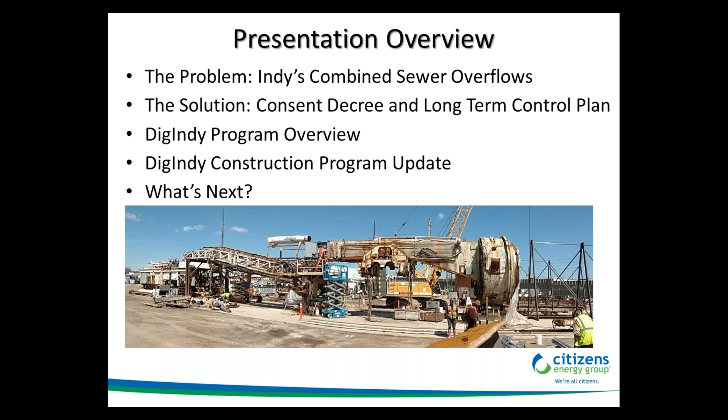Just to set the tone for the rest of the presentation, I'm not a big fan of slides with lots of words, so I'm going to try to keep those to a minimum. But there will be a few, so please just bear with me for a few slides, and then we'll get into more of a show and tell mode a little bit later on.

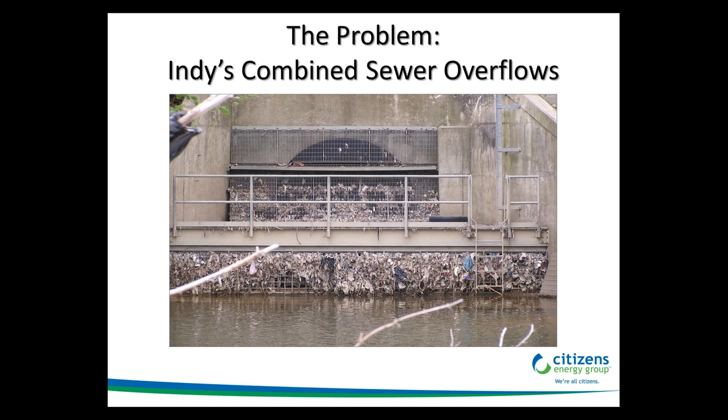So quickly, for anyone that may not be familiar with a combined sewer system, I'll provide this brief explanation. Basically, during dry weather, a combined system collects and conveys sanitary flow from residents and businesses to a wastewater treatment plant, where the flow is treated and released into a water body.

However, during wet weather, the combined system also collects storm flow, and in many cases in our northern cities, snowmelt, which combines with the sanitary flow. During certain size weather events, the system becomes overwhelmed, and rather than backing up through storm grates and into basements, combined flow is released to a water body.

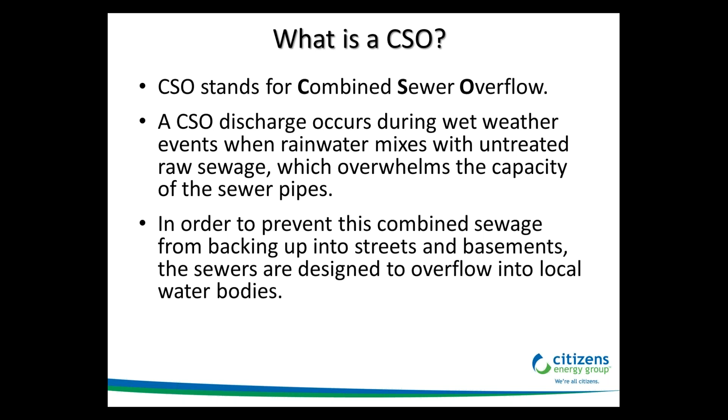Each year, there's an average of approximately 60 overflow events, spilling about 6 billion gallons of combined sewage into our waterways. Just to provide a little perspective, if we considered Indy's professional football stadium to be a vessel, we would have to fill it up 16 times to equal approximately 6 billion gallons.

Not to mention, portions of our system are so overwhelmed that as little as a quarter inch of rain in certain parts of town can trigger an overflow event.

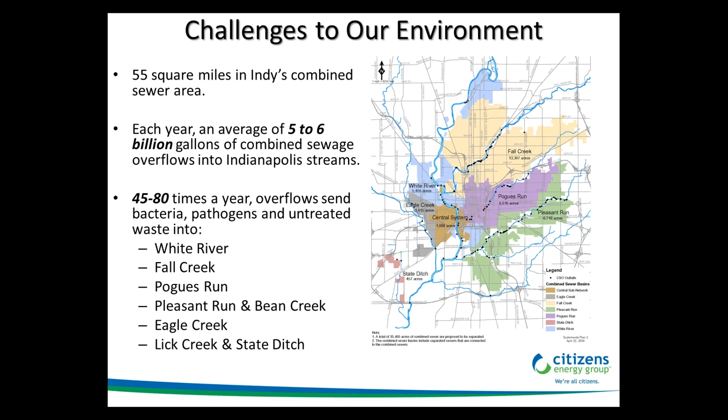So I've defined the problem. Now, what are we going to do about it? Just a little bit of background here. CSO abatement actually stemmed from the Clean Water Act. Ultimately, CSO communities must enter into some form of settlement with the Department of Justice and the EPA. Usually those agreements come in the form of a consent decree.

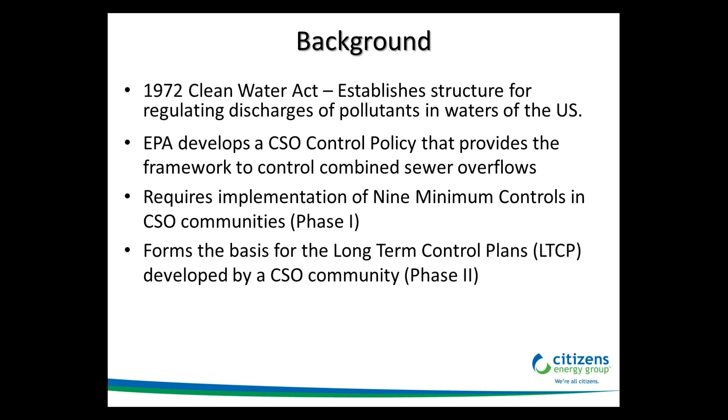A consent decree is a settlement binding a CSO community to comply with the EPA's CSO control policy. And what I'll be concentrating on for the rest of this presentation is our long-term control plan, which lays out our DigIndy system, as well as the time frame for which we have to complete it. And finally, one other quick point before we get into the fun stuff.

The City of Indianapolis entered into their consent decree in 2006. But what is unique to Indianapolis' situation is that in 2011, Citizens Energy Group purchased the water and wastewater assets from the city. Per the terms of that purchase, Citizens became liable to comply with the terms of the consent decree, but the city actually remained party to the agreement as well. So it's actually in their best interest for Citizens to successfully comply with the consent decree.

And Citizens is somewhat of a unique entity in that we are a public charitable trust. In fact, we are the only public charitable trust that provides utility service in the United States. And the important takeaway here is that we exist solely to provide utility service to the residents of Central Indiana. And we're basically a private company that operates on a zero profit basis, so we don't have shareholders to answer to. And this is especially important when considering that we can procure projects outside of traditional municipal bidding laws, and I'll provide some examples of that in a few minutes.

As I previously mentioned, our long-term control plan was actually developed under the City of Indianapolis and their team of consultants, and Citizens inherited it in 2011. However, it does continue to evolve. Basically, there were a number of early action projects which utilized modified flow control or inline storage to take advantage of areas in the system that had excess capacity. And those projects actually eliminated a significant amount of CSO volume from entering our waterways.

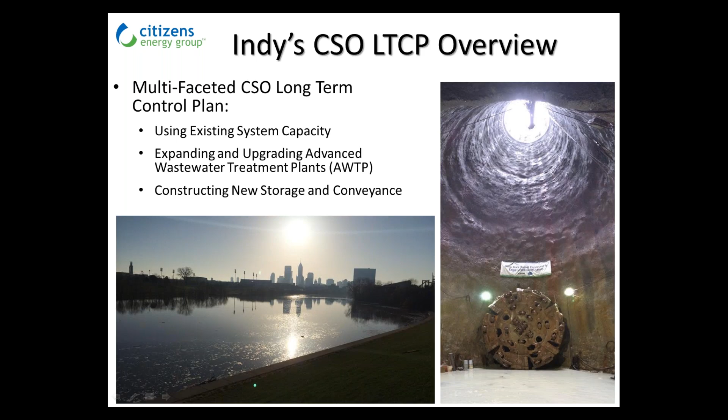So here we go with, as a construction guy, is the fun stuff, in my opinion.

The entire system will convey flow from north to south via gravity, where it will end up at our Southport Advanced Wastewater Treatment Plant. So while we do have 2 treatment plants serving Indianapolis, all of the tunnel flow and all of the CSO flow connected to the tunnel system will be conveyed strictly to our Southport plant.

But after a CSO event, the flow will be stored in the tunnel, and then it will be lifted by a 90 million gallon per day pump station almost 300 feet vertically up into the plant. The entire system has a storage capacity of well over 250 million gallons per event, and that will allow us to comply with our consent decree terms, which requires 95% capture by volume.

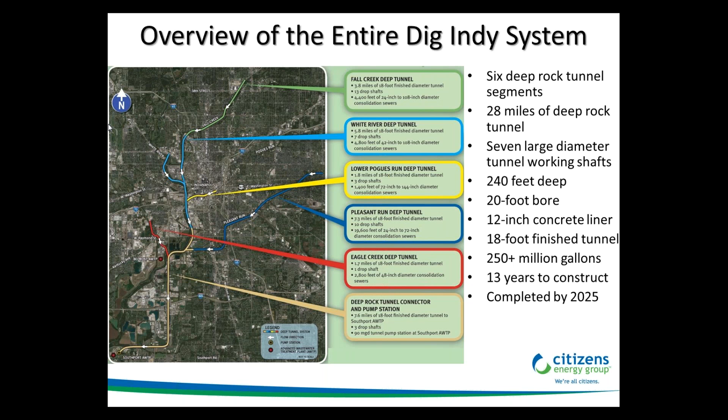Flow will be diverted from CSO outfall structures and consolidated through soft ground surface sewers, where it will enter one of 33 planned drop shafts. The drop shafts extend down into deaeration chambers, which are connected to the main tunnel through smaller tunnels referred to as adits. Depending on where the drop shafts are located with respect to the main tunnel, the adit lengths in our system can vary from a few feet to hundreds of feet.

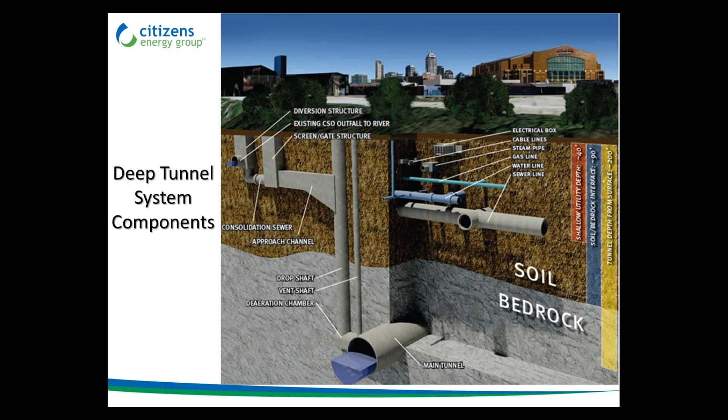At each drop shaft location, we also have a vent shaft that extends down into the deaeration chamber. The vent shafts are necessary because we utilize tangential vortex drop shafts, which entrain a great deal of air as flow falls down the drop shaft. The deaeration chambers allow for the air to escape rather than inhibit filling of the deaeration chamber and tunnel.

Our design team spent a great deal of time studying different drop shaft scenarios, including extensive physical modeling at the Iowa Institute of Hydraulic Research as well as Auburn University. The photo on the right was taken during a visit to Iowa to view some of the physical modeling they were performing for us.

I mentioned earlier that we have 134 CSO outfalls in the system. The tunnel won't capture all of them, but we will be consolidating approximately 100 of them into 33 drop shafts. We want to keep the number of drop shafts down to a minimum due to the cost to construct and the surface disruption, and we're actually studying eliminating 2 of them along our Pleasant Run alignment as we speak.

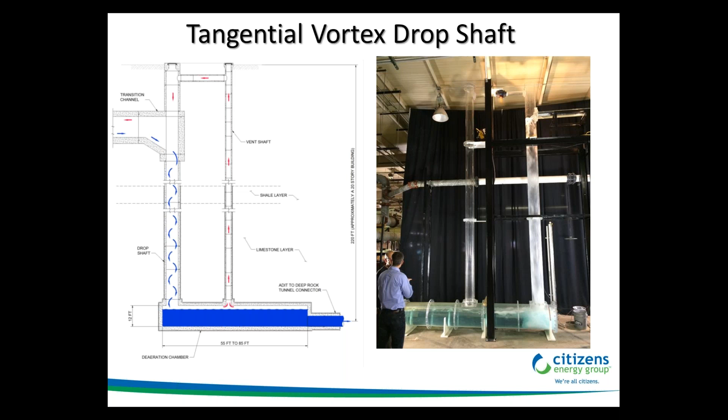So the program is constantly evolving. Because I mentioned the deaeration chambers and vent shafts, I want to take a quick second to discuss tunnel ventilation with respect to air exiting the main tunnel during filling. We have about 250 million gallons of storage capacity, and when it's empty, it's full of 250 million gallons of air.

On the right is a screenshot of our transient flow model, and you'll notice that during our design storm, the tunnel system fills from the middle. This actually traps a massive amount of bubble, which I lovingly refer to as the tunnel burp, at the downstream end of our tunnel. As filling continues, this bubble will be forced upstream along the crown of the tunnel, where it will eventually exit at the first few shafts it encounters.

Our issue is that the first couple of shafts are small diameter utility access shafts, and the velocity and violence that the air exits will cause geysering. We know that other systems, including Chicago's TARP system, has had real issues with geysering, and they've actually experienced geysering events so violent that manhole structures have been blown out of the ground.

So we've done extensive research and physical modeling to understand this phenomenon, and to prevent geysering in our system, we're actually going to seal off our utility shafts where they intersect the tunnel, forcing the tunnel burp up to one of our larger diameter tunnel working shafts. We're also building bulkheads along the crown of the tunnel at a few of our branches to keep air from heading towards dead ends and directing it to larger diameter shafts.

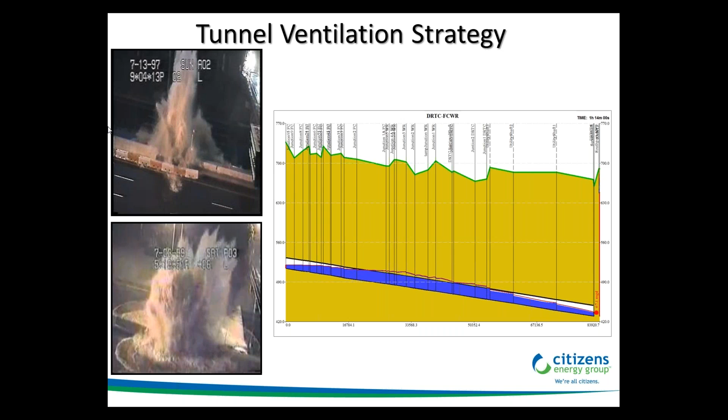So I talked a lot about the number of shaft locations that we have to build, and that really is where the surface disruption and the visibility of our program is going to come into play. The map here represents each of our drop shaft locations as well as our deep tunnel working shafts. Just to provide a little perspective and space, the yellow line, our Lower Pogues Run Tunnel, runs right through downtown Indianapolis. Interestingly enough, the 28 miles of deep tunnel that we're constructing is minimally impactful to the community.

We have a whole team of folks that work to form relationships and educate literally thousands of stakeholders impacted by the tunnel construction. We also have a team of real estate professionals dedicated to the land acquisition necessary to construct a program of this magnitude.

Designing and constructing a project like this isn't possible without poking a few holes in the ground, especially since it spreads out over 28 miles. So I won't spend a lot of time talking about the geotech, but it is important to note just how extensive a quality geotechnical program is for this size of project.

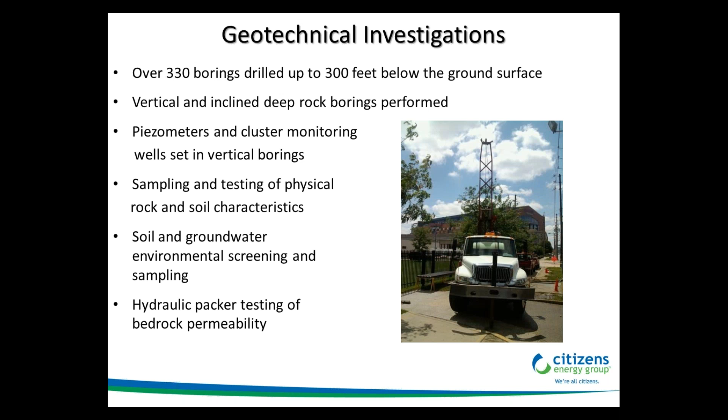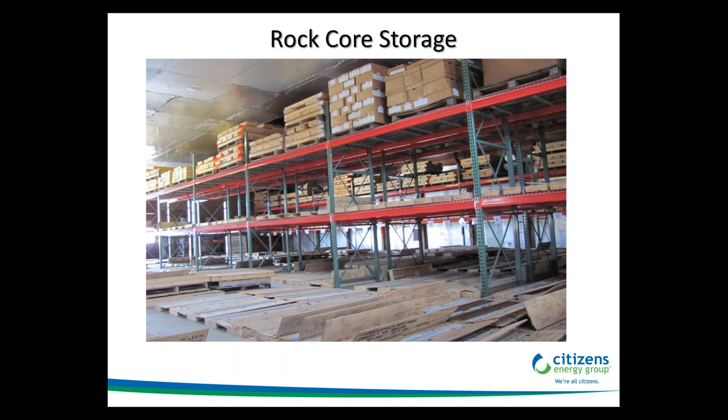You can imagine we collect a lot of samples with that many borings and the extent of the investigation. Here's a shot of part of our rock core storage warehouse, and another view of the other half with cores laid out. This was during a procurement event for our first tunnel project where contractors and their engineers were welcome to view the cores.

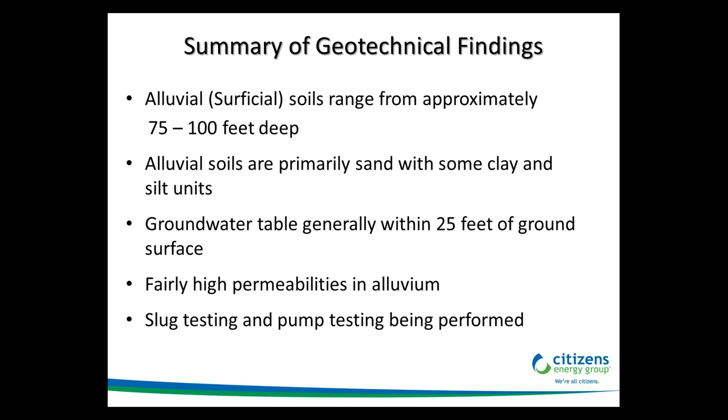So what did we find? Basically, on average, we have about 100 feet of glacial outwash over the top of our bedrock in the Indianapolis area. And we have a high groundwater table, which makes construction through pervious overburden very challenging. With respect to our rock, we have really favorable rock for tunneling. It's strong, but it's not overly hard or abrasive.

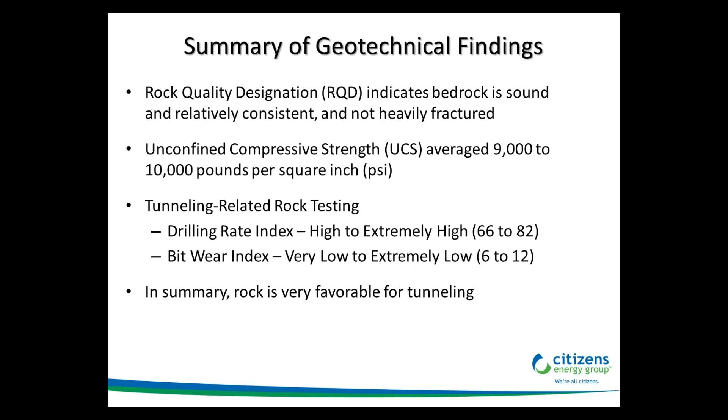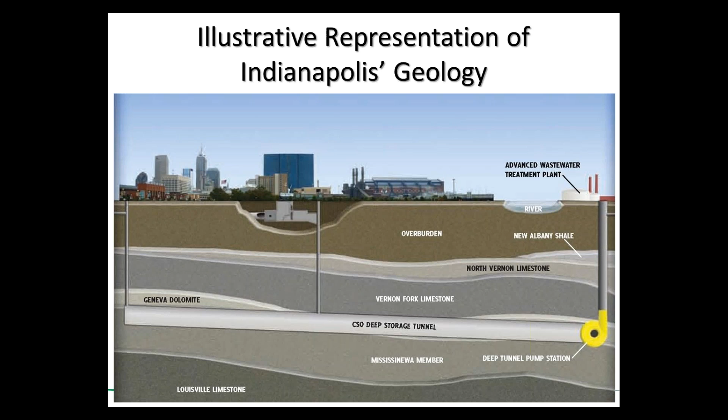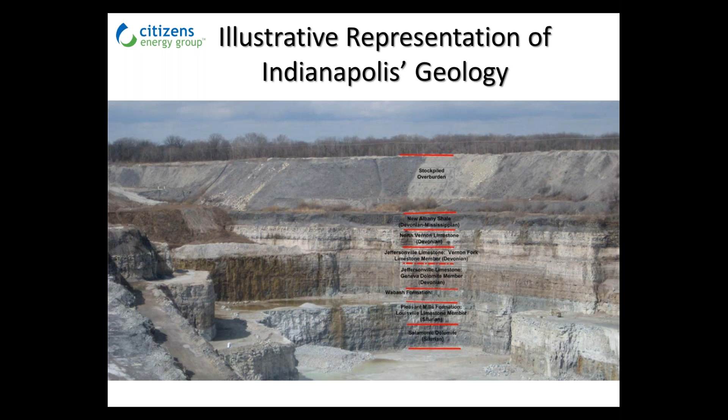I realize this is probably a little difficult to read, but we do have an aggregate mine within close proximity to the tunnel project. So, another representation of the area geology. We also have the potential for some karstic features, which can and do make water. We've never encountered one this large in the tunnel bore, but I've seen a few in the sidewalls of the tunnel that are on the order of a few feet in diameter.

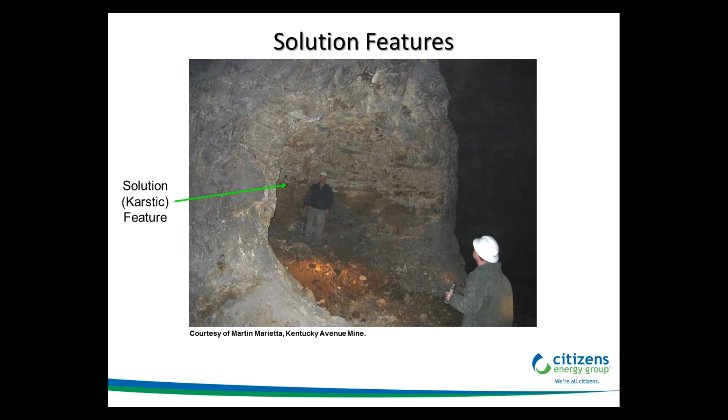Now I will transition over and spend some time discussing where we're actually at with the construction side of our program.

Based on the terms of the consent decree, we have a staged construction schedule. This allows us to spread out the construction effort and spend over time while still bringing parts of the tunnel system online early in order to gain beneficial use and start getting CSO flows out of the waterways as soon as possible. For example, when we bring the Deep Rock Tunnel Connector and Eagle Creek Deep Tunnel online later this year, we'll begin capturing about 1.3 billion gallons of CSO annually. And when White River Tunnel and Lower Pogues Run tunnels come online at the end of 2021, we'll experience a huge increase in that annual capture.

So beneficial use before the end of the program is a big deal to us, and it also demonstrates to our ratepayers, who ultimately fund this project, that we are making steady progress and recognizing environmental benefits along the way.

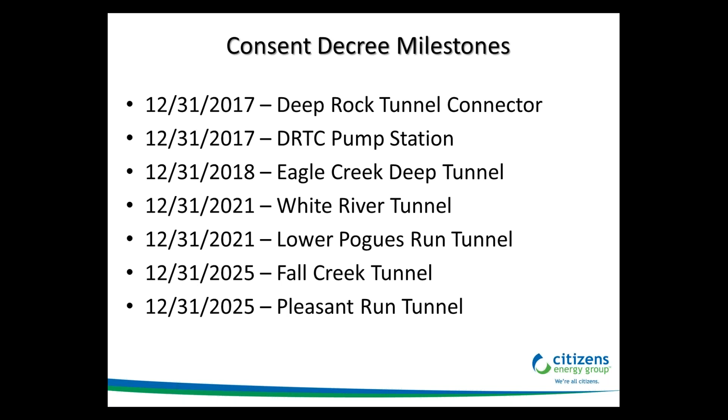I want to quickly point out that since construction commenced in January of 2012, we've received a lot of favorable press, both nationally and internationally. In fact, our project was recognized by ITA in 2015, which was a big honor. Of course, this is a testament to our engineering team and contractor. As an owner, we remain very humble and understand that without a huge team of talented people, success of this program wouldn't be possible.

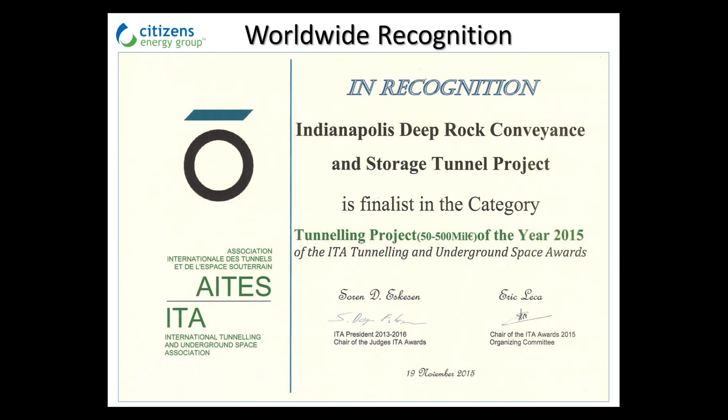I just want to take a second. I keep saying deep, so I want to provide some perspective on what our definition of deep is relative to our system.

On the right is a schematic showing the end of the line of our tunnel system and its connection to our deep pump station. If we were to place the Statue of Liberty in the bottom of our pump station, only her torch would stick out of the top of the shaft. That's just a little reference for what deep means with respect to our tunnel.

I'll also point out that the schematic on the right shows 2 shafts down to the tunnel prior to the connector tunnel to the pump station, and that will be important in the next slide.

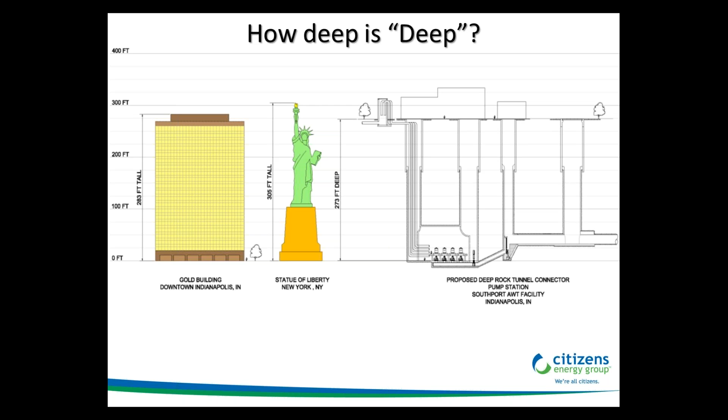Here's a closer look at our pump station. To reiterate, following a wet weather event, when the pump station is activated, CSO will enter the screen and grit shaft through the 18-foot diameter tunnel, or it will flow through a bar screen on its way through a 6-foot diameter connector tunnel.

The connector tunnel feeds a 6-foot diameter suction header, which is connected to 4 30 MGD pumps. The station is rated at 90 million gallons per day, so 3 pumps with 1 in reserve. Flow is lifted by the pumps up twin 42-inch discharge lines, where it is then conveyed to the treatment plant via gravity. One thing I'd like to point out, that the original tunnel launch shaft and the screen and grit shaft were 2 different structures as shown on the previous slide.

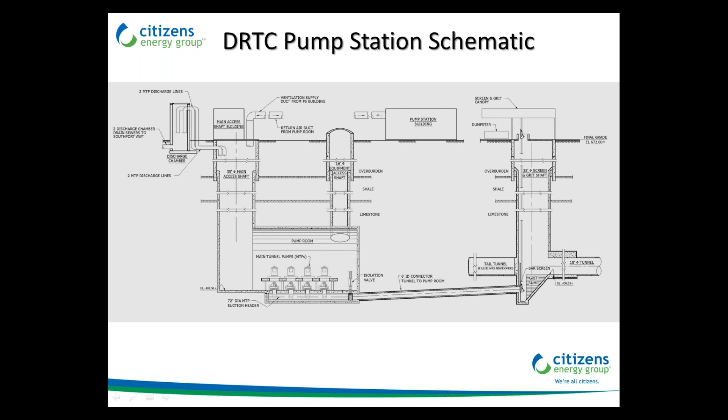However, through a value engineering exercise, the dedicated screen and grit structure was eliminated, and the tunnel launch shaft was converted into the screen and grit shaft after completion of the tunnel. This saved an estimated $8 to $10 million, and anywhere along our system that we can eliminate tunnel working shafts or drop shafts, we have done so, which adds up to huge savings over the course of the program.

And for you mechanically inclined folks listening today, here are some of the stats on our pumps. I'll also mention that our pump station contractor is a joint venture between Oscar Renda and Southland, both out of Texas. The pump station project commenced in mid-2014 and is expected to come online by the end of this year.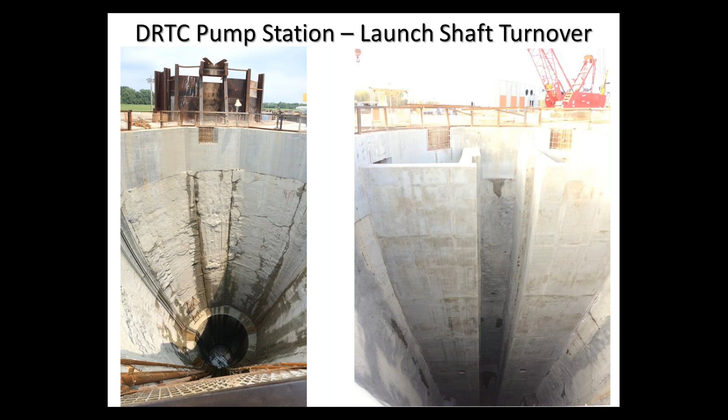On the left-hand side is our tunnel launch shaft prior to the screen and grit build-out. This was after mining was complete and the tunneling contractor demobilized from this shaft. On the right, you can see the guide walls that have been cast, which house 2 sets of guides for the rake mechanism that cleans the screens and the grit clam bucket to travel up and down.

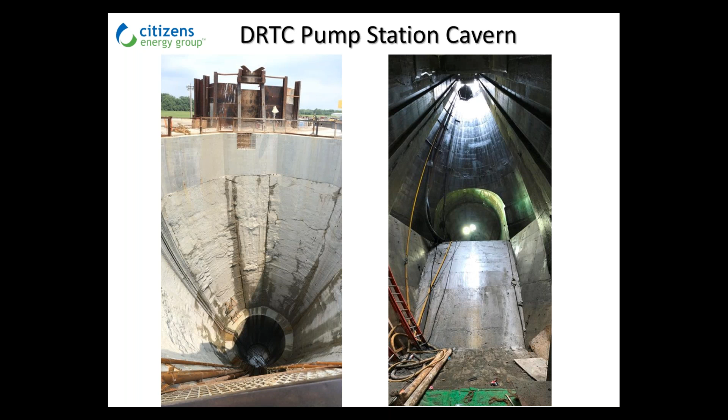The project was originally awarded just as the Deep Rock Tunnel Connector, as the Eagle Creek concept was for a shallow interceptor to be solicited at a later time. However, that shallow interceptor was a very high-risk project that extended open-cut construction through a business corridor, a residential neighborhood, and the city's levee and flood control system.

Our contractor was actually aware of that future soft ground project, but they proposed making it a deep rock tunnel instead, to mitigate the risk from the soft ground option. Their proposal included backing the tunnel boring machine up after finishing the Deep Rock Tunnel Connector drive, then relaunching it up the Eagle Creek alignment underground without the need for an additional shaft.

This concept was very innovative, and we worked with our engineers to fast track a design. We had to go out and get additional geotech, obviously work with our permitting agencies. In about 5 months or so, we went from inception of the idea to actually mining. So it was a really quick turnaround in a big effort.

But we were able to actually construct that Eagle Creek deep tunnel for less than the soft ground concept in the end. And due to the additional storage volume of 17 million gallons that the Eagle Creek leg provided us, we were able to eliminate about another $15 million in planned infrastructure that was downstream from this area.

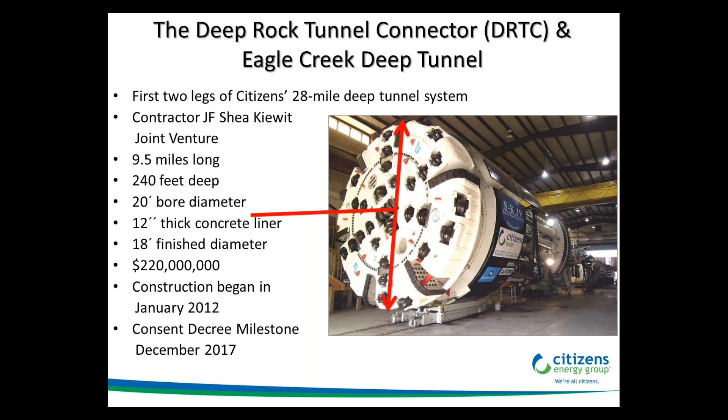I mentioned earlier that we are somewhat of a unique entity in that we are private, and so sometimes you have the advantage of being able to do things like a fast-track $38 million change order. So for us and our ratepayers, as well as the environmental impacts that change had, it's a huge benefit at times.

And speaking of the cutterhead, our contractor is using a Robbins main beam tunnel boring machine. In an effort to save a little time, I won't show the animation, but I will encourage everyone to check it out on YouTube later.

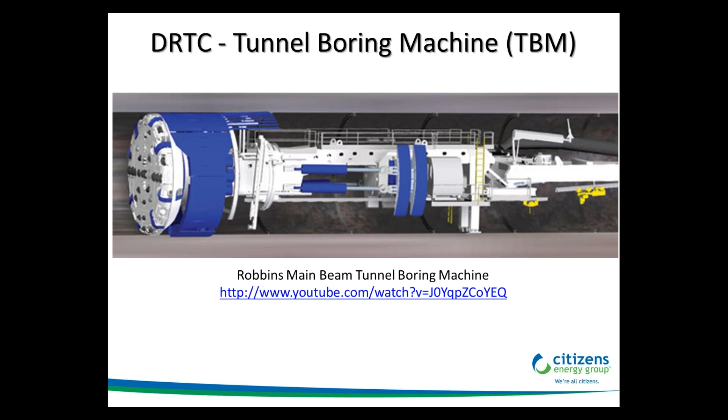Just a couple of interesting facts about our TBM, which is actually 40 years old and has been refurbished multiple times. It spent most of its life in New York and was most recently part of the Second Avenue Subway project. One thing I'll call attention to is that our TBM produces approximately 20 cubic yards of loose rock spoils per foot of advancement. So basically, one tri-axle dump truck leaves the site full per foot of tunnel mined.

Pretty amazing considering that the first two tunnel legs were about 51,000 feet. So that is a lot of truck trips and a lot of diesel fuel.

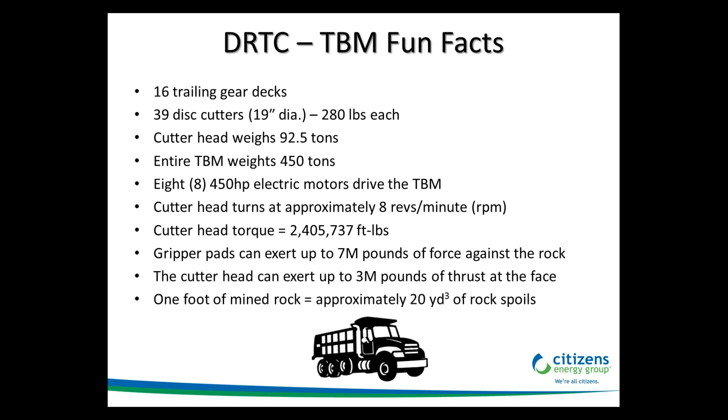I'll also point out that our contractor and this TBM achieved 3 mining world records for hard rock TBMs between 20 and 23 feet in diameter. This is a testament to the design of the cutter head, which Robbins made specifically for this project, the refurbishment of the machine itself, obviously the contractor's forces, and the quality of our rock that I mentioned earlier. The contractor claims on future projects in Indianapolis they will break these, so we will stay tuned.

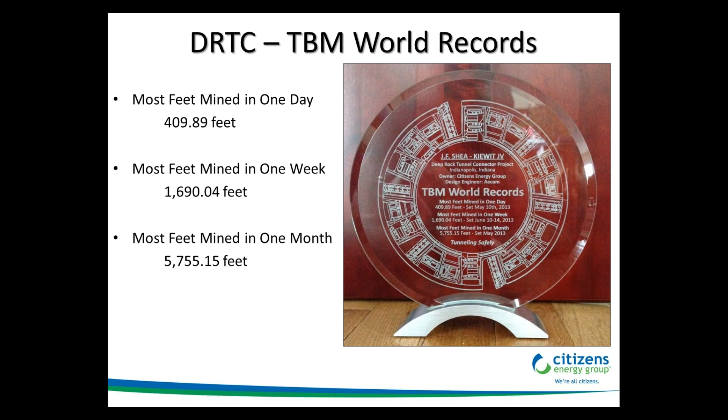In fact, the further out we got, I would venture a guess that the conveyor system was probably the limiting factor to the TBM production rate, but it did operate very well over the 7.8 miles of that first alignment.

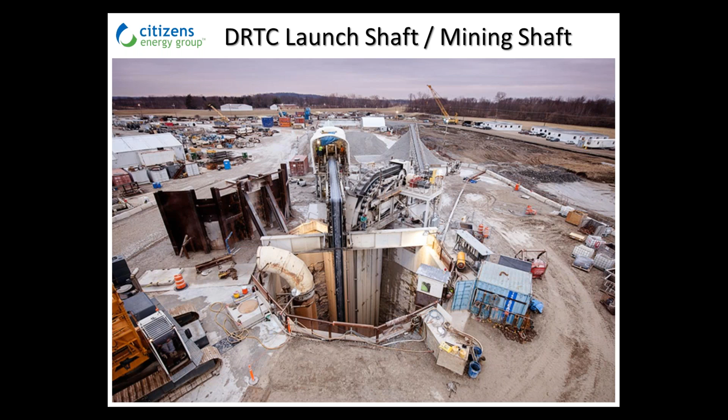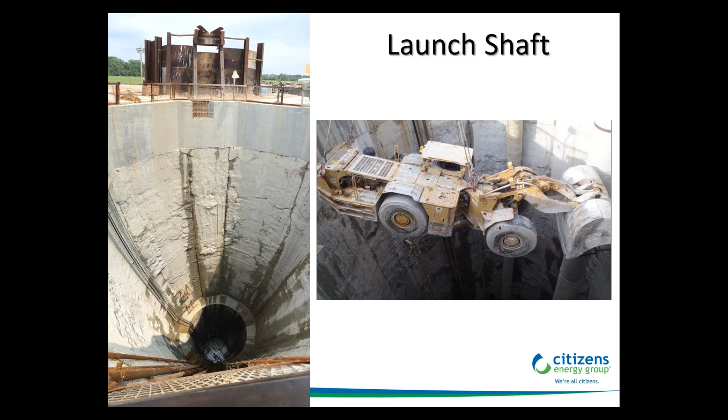We don't have an elevator or a stairwell, so the crane and cage is our only means of access down into our tunnel system. Just a couple of nice shots of the bottom of the shafts with the tail tunnel visible in the photo on the right.

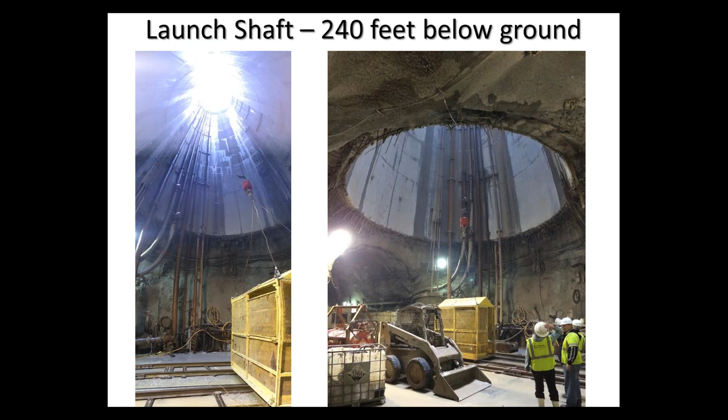After the main shaft was constructed, the contractor then constructed a 500-foot long starter tunnel in order to assemble the TBM underground. It was about 24 feet high and was excavated in a horseshoe configuration using drill and shoot techniques. In the foreground, you can see the false walls that were necessary to allow the TBM's gripper pads to react against during the initial mining launch.

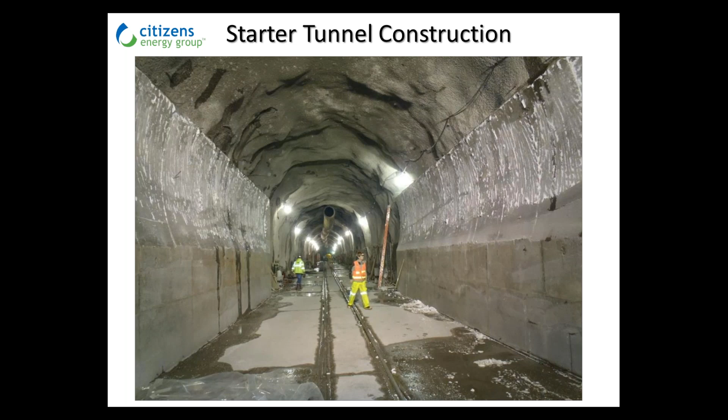This is what our mine tunnel looks like. The photo is taken right at the transition from the starter tunnel to the mined tunnel. You'll notice that primary support is really a modest rock bolting pattern along the crown, and of course you have all of the various utilities required to support the tunnel boring machine.

So we'll take a quick trip up to our Eagle Creek Deep Tunnel alignment. We have the DRTC alignment to the right and the Eagle Creek Deep Tunnel to the left. As the TBM reached the upstream terminus of Eagle Creek, which was about 9,200 feet from where this photo was taken, it was actually backed down to this bifurcation and then walked about 11,000 feet back up to the Deep Rock Tunnel connector alignment, which was previously mined, and it was parked underground about 500 feet past the retrieval shaft.

I do want to point out that this is exposed rock, pre-concrete liner, and this is just another reminder of how lucky we are from a geological standpoint.

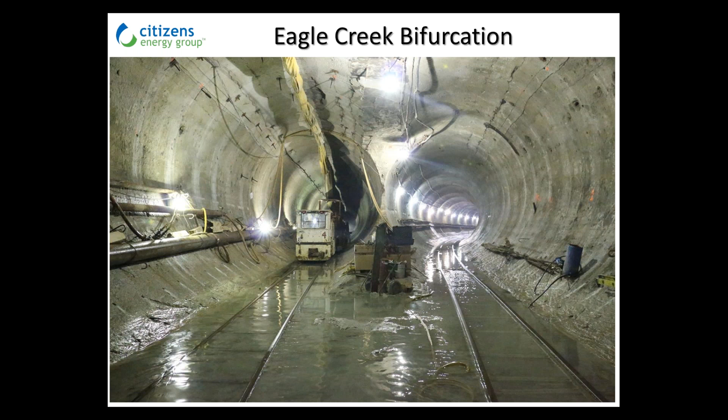I mentioned earlier that once mining is complete, all of the tunnels will be lined with concrete. Here's a shot of the concrete lining formwork, and perhaps it's the nerd in me, but whenever I see this, it reminds me of the Millennium Falcon. But I digress, so the lining operation was absolutely amazing.

Once the contractor got in a groove, they could form, pour, clean up, strip forms, and relocate forms in a 24-hour period. They formed and poured 240 feet of liner per day, which required up to about 600 cubic yards of concrete per pour. Concrete was pumped from the ground surface through various shafts and drop holes and could be pumped up to 3,500 feet horizontally in either direction from a single drop hole.

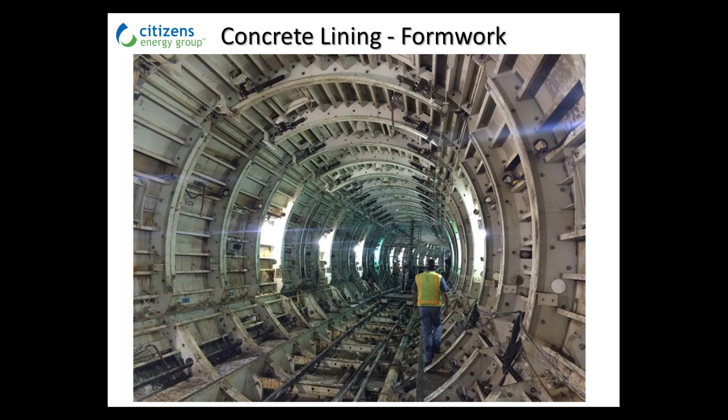Here's the finished product. Over the course of the first two tunnels, the contractor placed about 130,000 cubic yards of concrete. Following the concreting operations ongoing right now, the contractor is performing post-lining grouting through the areas where inflow is beyond specified limits.

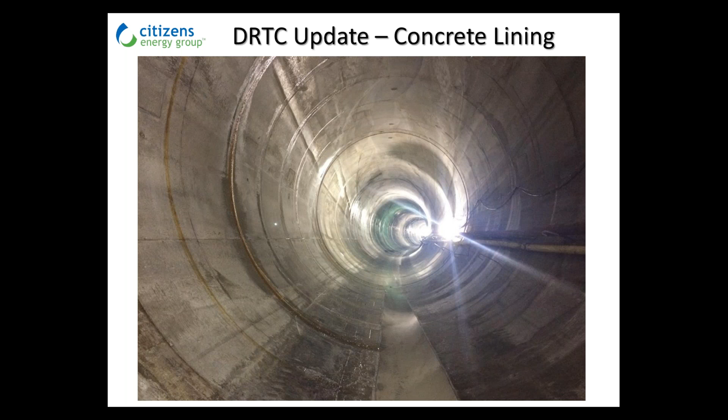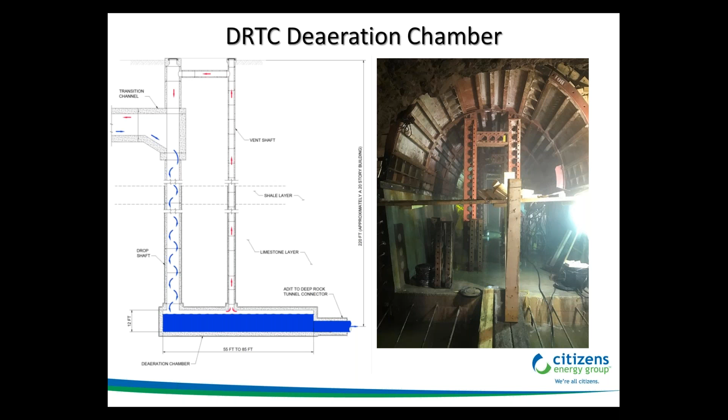Earlier I described the vortex drops in the deaeration chambers, so here's a shot of the concrete formwork in one of the deaeration chambers. This is very difficult handwork, 225 feet underground in very tight space. This is some of the slower work and some of the more expensive work. Again, where we can eliminate drop shafts and deaeration chambers, it saves time and money, but these guys do a really good job in very tight quarters.

A quick couple of slides describing how our drop and vent shafts are constructed using raise bore methods through rock. Through the soil overburden, we obviously have to use top-down methods like the slurry drilling and steel can support I showed earlier in the presentation. But we actually did build a few shafts early on through the rock using top-down methods, but they were very expensive and cumbersome and also time-consuming. One of the other issues is top-down rock drilling of this magnitude takes up a lot of real estate on the ground surface.

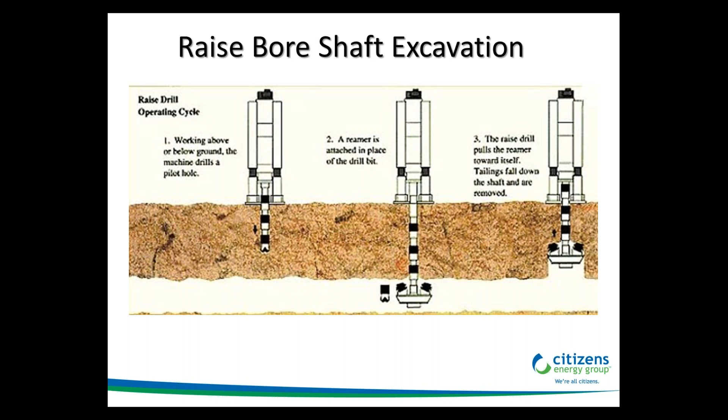The raise bore method requires a much smaller footprint on the surface than top-down methods. On the left, you can see the raise bore rig, and on the right, you can see the reamer getting ready to make its journey to the surface.

This method worked so well on our first two tunnels that we specified it as the only acceptable method on our four future tunnels. The only caveat is that the tunnel and deaeration shafts have to be mined and excavated first, which can affect construction sequencing if you don't have an adequate amount of schedule.

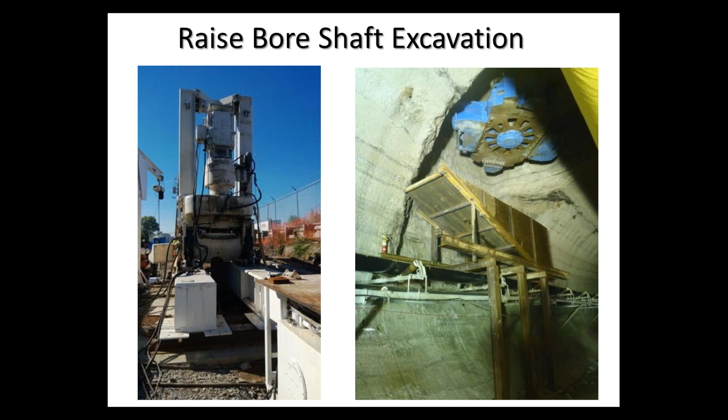For the future work, the tunnel contractor will be responsible for constructing the shafts to the surface, but we will solicit separate packages for the consolidation sewer work and surface connections to those shafts. This allows local contractors a chance to get at some of our work on the program, beyond the highly specialized tunneling packages that typically go to the big national guys from out of town.

Now I want to head up to the Deep Rock Tunnel Connector Retrieval Shaft, which is also our White River Tunnel Launch Shaft. As I mentioned earlier, the TBM was parked about 500 feet past the retrieval shaft. This was done to get a head start on the starter tunnel for the White River Tunnel alignment.

The contractor elected not to excavate the shaft down to the design invert, in order to allow the gripper pad something to react against as the machine mined through the shaft and out the other side.

Upon initial breakthrough, the contractor actually mined about halfway into the shaft and then backed the TBM up to the face, strictly for this photo opportunity. But that made the owner really happy, as well as the media, and I think the tunnelers' forces got a kick out of having a nice hole-through party.

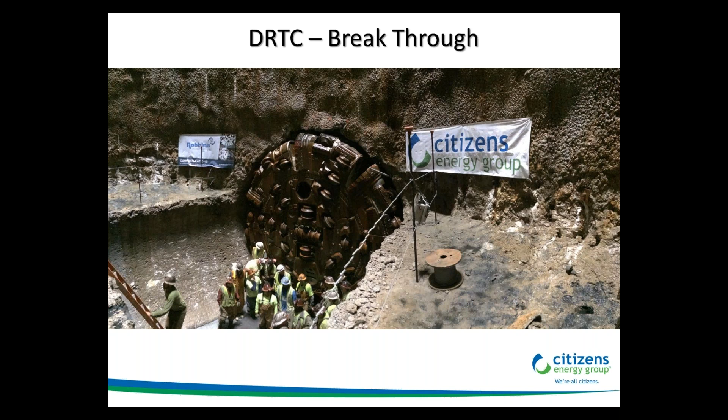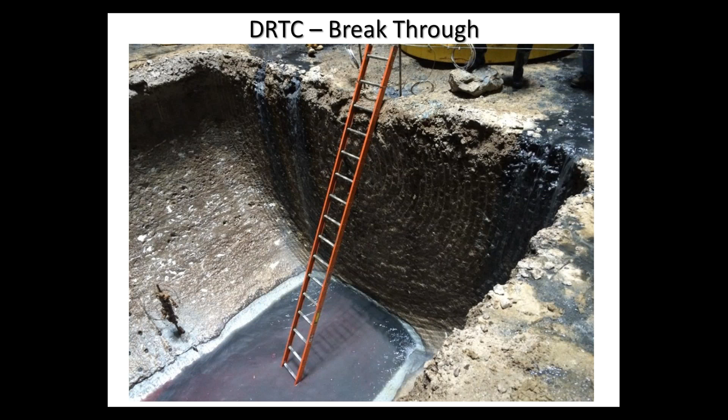Mining into the shaft and backing up provided a very interesting view of the rock face, which you don't normally get. It shows just how the disc cutters score the rock in a radial pattern as our tunnel boring machine cutter head advances.

Here's a cool shot you do not get to see very often. This is our tunnel boring machine actively mining through the shaft while partially exposed. Again, it drove about another 500 feet past that shaft, where it was parked underground.

Just to put closure to the Deep Rock Tunnel Connector and Eagle Creek Deep Tunnel projects, we anticipate substantial completion will be achieved by May of this year. So in a couple months, we're really rounding third on those projects. One of the last tasks we have to complete is installation of fiber optic cable through the tunnel system, which will connect all of the tunnel instrumentation, the remote screen and gate structures, and both of our treatment plants.

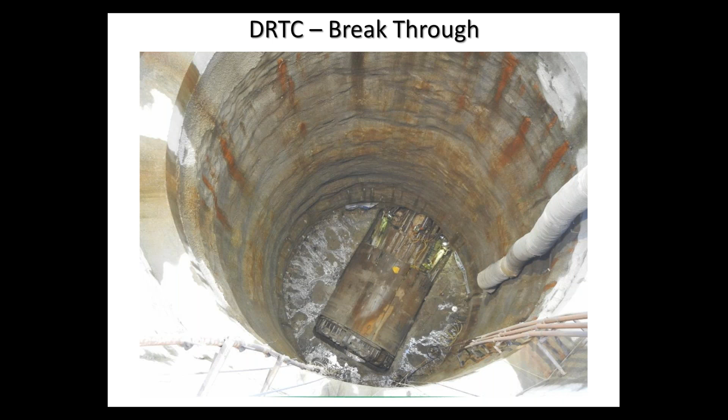So as we have been busy constructing the first two legs of the tunnel and the pump station, in 2015 we held a solicitation event for the construction of our next two legs of the tunnel system: the White River and Lower Pogues Run tunnels.

The tunnels had to be packaged together because mining is going to progress up the White River alignment, shown in light blue, but then the TBM will veer off and mine the Lower Pogues Run tunnel alignment, shown in yellow. Similar to the Eagle Creek tunnel, once the terminus of the Lower Pogues Run tunnel is reached, the tunnel boring machine will be backed down the mined tunnel and relaunched underground, back up the White River alignment. This same scenario will be executed again when the contractor mines the dead-end hook portion of the White River alignment, visible to the northwest.

We learned a lot of lessons about backing up the TBM on the Eagle Creek Deep Tunnel, which actually allowed us to eliminate a retrieval shaft at the end of Lower Pogues Run. Being able to back up is really a strong tool in our toolbox, and it has allowed us to do some great things, especially from a scheduling standpoint. So I might even venture a guess that when our program is over, this TBM will perhaps hold a world record for total feet backed up by a TBM as well.

So based on the proposals during that 2015 solicitation that I mentioned, we awarded the project to our incumbent contractor, the Shea Kiewit Joint Venture.

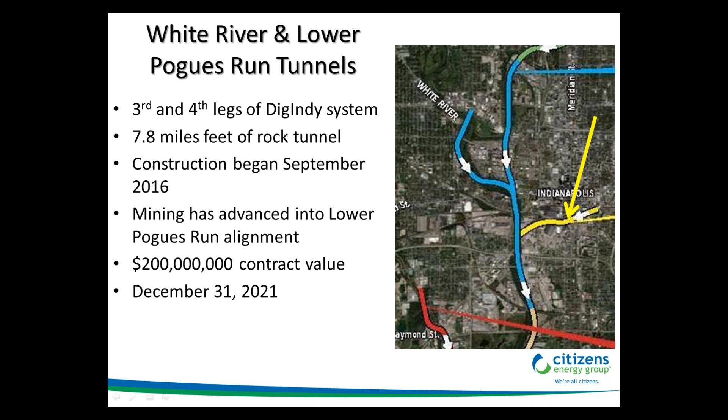I'm going back to this slide to demonstrate the number of surface sites that we're going to impact over the course of our program. I want to draw your attention to one of those sites in particular located on our White River tunnel alignment. In fact, it's the end of the line of the hook I referred to earlier.

But this is an example of collaboration with third-party stakeholders. Because our program is so long, and in some cases locations identified during design are very different than when you actually arrive to build something, it's imperative to be flexible and keep in close communication with all parties involved.

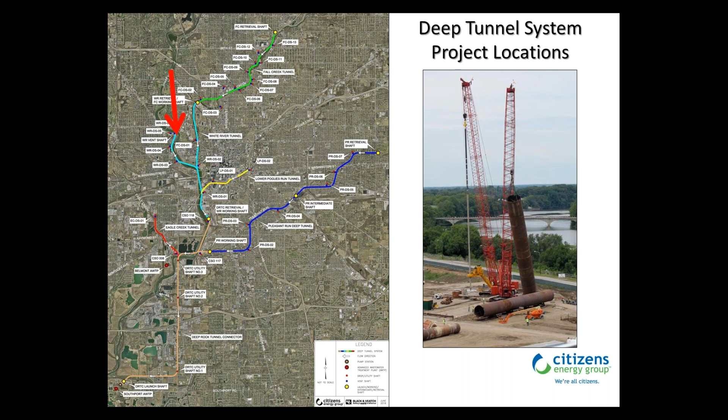In this case, the city of Indianapolis and a large real estate developer were going to transform Indy's old minor league baseball park into luxury condominiums. However, we had identified a portion of that property as the location for a drop shaft, as it was located near 2 large CSOs on our system.

So we actually fast-tracked the design and construction of that particular infrastructure and constructed it almost 7 years ahead of when the tunnel will actually connect to it.

This is one of those cases where we had to use top-down shaft construction methods through the rock down to the tunnel elevation, and part of the reason we don't want to do it anymore is the experience we had on these a couple of these early projects.

But we were able to get in and out without delaying the development, and future tunnel connections will be made underground once the tunnel alignment extends to that point, so we don't have any future surface disruption in this area.

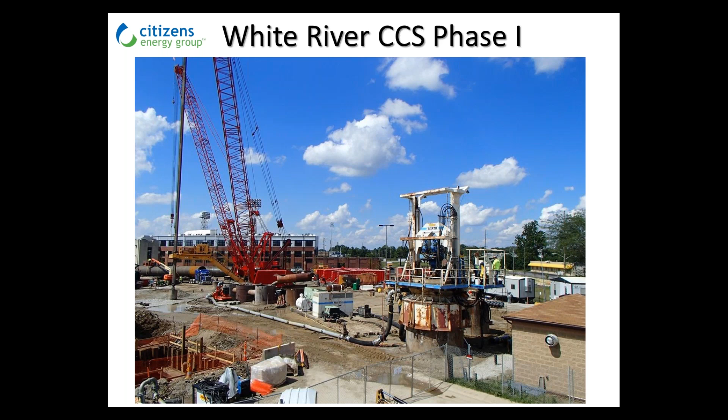And here's a shot of the completed development in the background and our infrastructure in the foreground. While construction disruption is very large, the infrastructure we leave behind is very discreet.

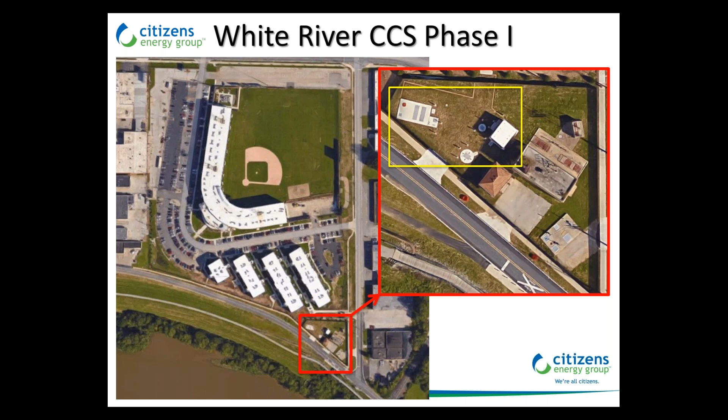This is one example of a couple of projects we've actually had to go out and build ahead of our original schedule in order to accommodate external stakeholders, but from a community standpoint, it is the right thing to do.

And to wrap up here, just a quick peek at what's next. I already mentioned the White River and Lower Pogues Run tunnel status, but here you can see all 4 of our remaining tunnels that will be constructed by the Shea-Kiewit joint venture with respect to one another.

Once the tunnel boring machine reaches the end of the light blue line, the White River tunnel, it will then continue on mining the Fall Creek tunnel, where we will have a retrieval shaft at the end of Fall Creek, and that tunnel boring machine will be disassembled, brought to the ground surface, and it will undergo another full refurbishment prior to remobilizing it and mining our Pleasant Run tunnel.

Because that Pleasant Run tunnel is another 7.3, 7.4 miles of tunnel, so just to make sure that machine will get us to the end, we do have another refurbishment planned.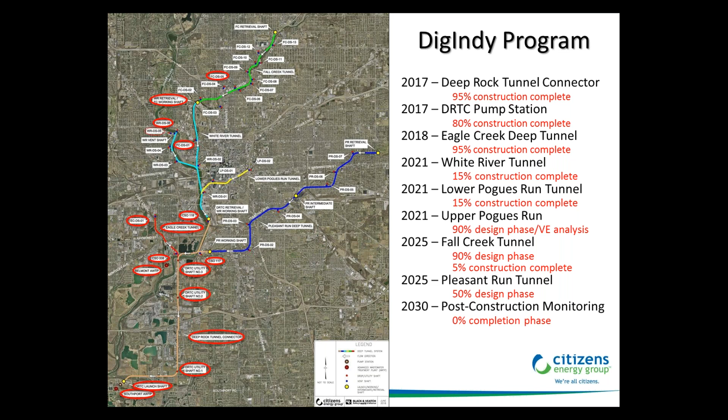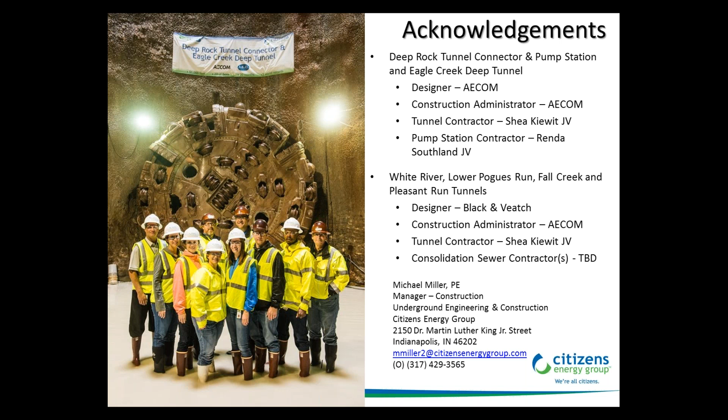Oh, fellow nerds, I appreciate it. Definitely equipment junkies, yes. So thank you everybody for joining us today, and we hope you can join us for the next UCA Young Members webinar on March 29th. Visit the UCA Young Members website for additional information on that webinar, and we hope you have a great day.